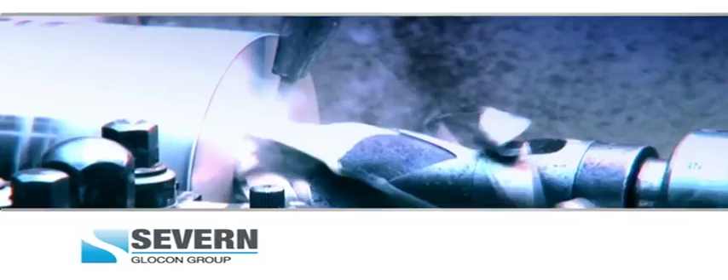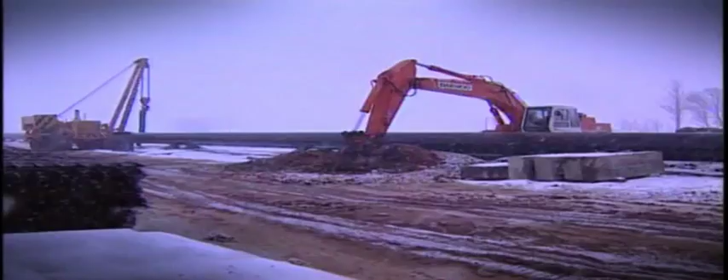Oil, gas, power. Industries vital to keep the world running and home to some of the harshest conditions known to man. Here, extreme pressures and temperatures mix with corrosive gases and liquids inside massive pipelines. Controlling them is a mammoth task. The room for error? Zero.

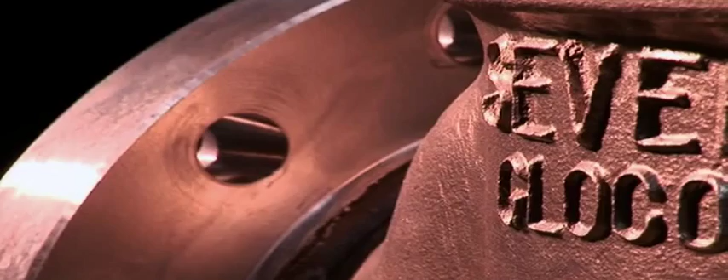This is the world of Severn Glocon Group, providers of specialist valves to the process industry front line for over 50 years.

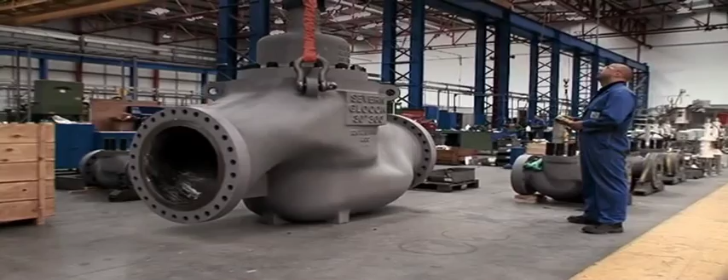Severn Glocon designs and manufactures a range of extreme control valves for hostile environments. The industries which we supply are oil and gas, energy supply industries and power plants all over the world. As a group, we can take on projects which are large in scale, maybe 100, 200 valves, or alternatively we can talk to the customer about specific issues that he's having and we will manufacture a single bespoke valve to suit that issue.

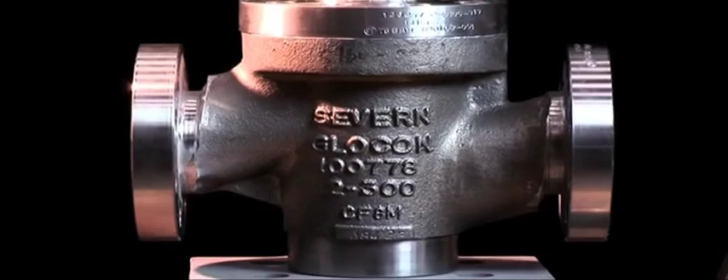Severn Glocon Group is a multinational company. Our international network of manufacturing, sales and service outfits offers our customers a truly global reach. Wherever oil, gas and power regions flourish, we operate. From the Far East to Australia, the Middle East and the Americas. We are also proud to have vendor approval from some of the world's leading suppliers and brand giants in the field today.

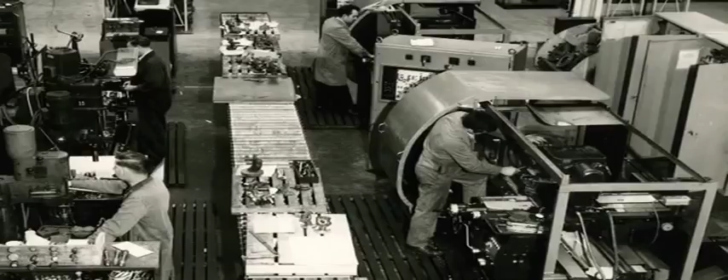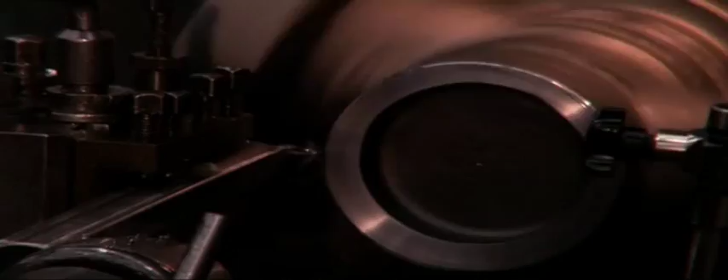At Severn Glocon, there is one thing we hold dear. Our British engineering heritage is at the heart of everything we do. Starting life over 5 decades ago as one of the UK's first specialist valve makers, we now boast state-of-the-art factories across England and in Chennai, India. British quality is built into every valve we make, from the final product right down to our initial engineering approach.

Severn Glocon doesn't really sell valves. We sell solutions to customers' problems. Our highly skilled workforce can manufacture valves from 2 inches to massive 36-inch bore diameter for the most extreme conditions.

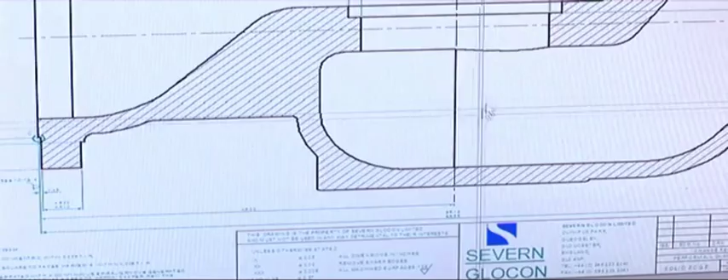We design exactly to the customer's requirements. We can determine the correct material for that application, the correct rating for the valve, the correct size. We can check noise levels, we can check velocities, we can check for erosion and corrosion, and from that we'll come up with a valve designed to suit its purpose.

The designs are crucial to us. Our in-house design team, we have 2D and 3D CAD, and that is common through all the Severn Glocon Group companies.

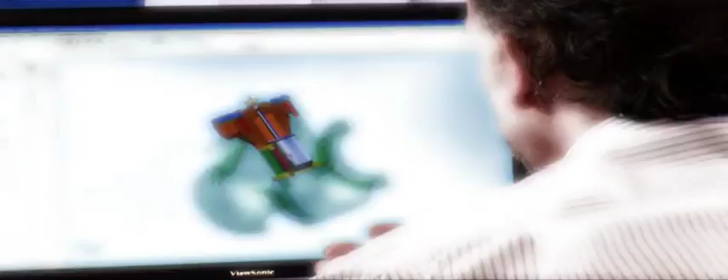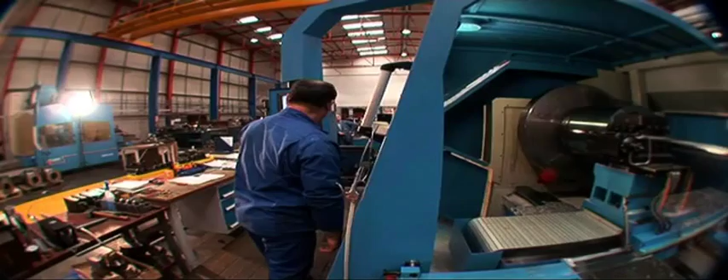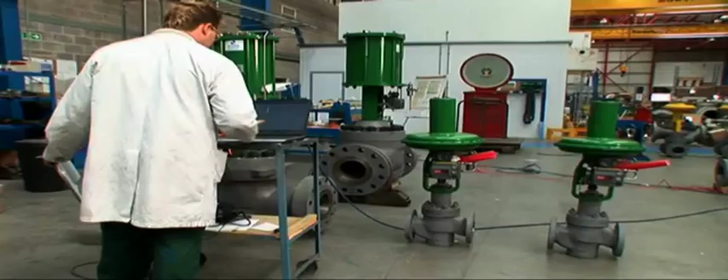Once designed, any valve made by Severn Glocon goes through a tightly controlled manufacturing process. High-tech CNC machines work to tolerances not normally seen on such large products. Our coatings range can meet any conditions, from simple epoxy resins to complex anti-corrosive systems. We have a positive pressure clean room manufacturing air separation valves for the food and healthcare industries. We assemble all valves in-house, where any type of actuator or intelligent control system can be added.

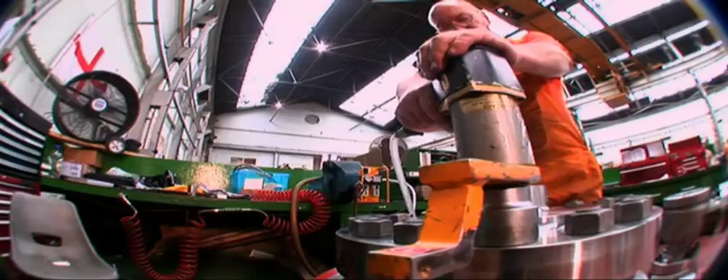In severe service, it's vital to the success of a plant that valves work as planned. We carry out all our own testing and make sure every valve meets the stringent standards demanded by liquid natural gas and oil and gas applications.

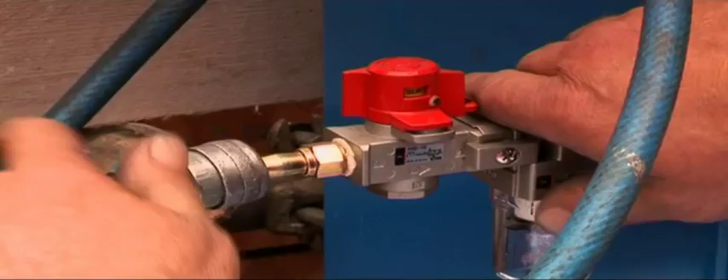Many air separation processes happen at extremely low temperatures, and any valves made for them must be able to stand up to the task.

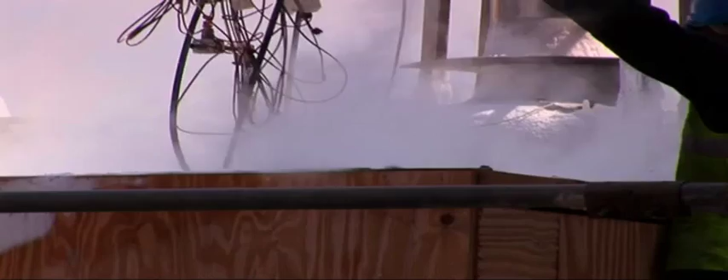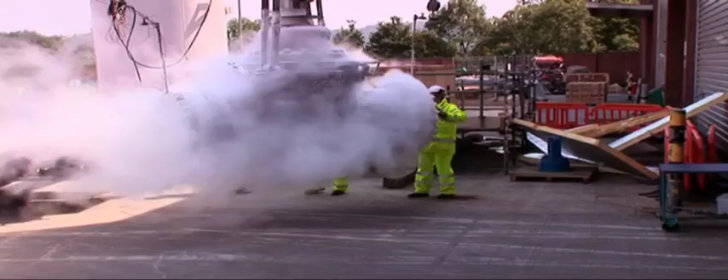A major part of Severn Glocon's heritage is working with cryogenic gases for the air separation industry. Valves behave differently under cryogenic conditions, so it's crucial to Severn Glocon that the valve will perform when it gets into service. Valves, some larger than 10 tons, are reduced to minus 196 degrees centigrade before being rigorously assessed and monitored through their full functions, all on our own premises.

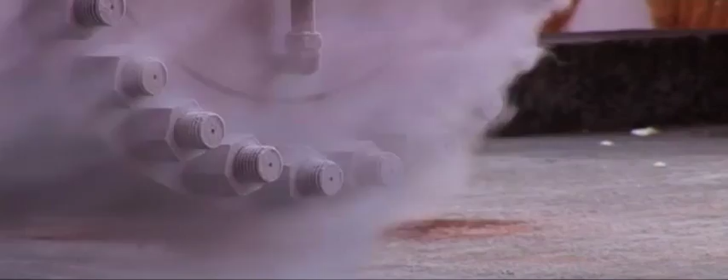It's something we've developed over many years. The procedures are robust, and by having that facility in-house gives us much greater control over the timeline for the testing and allows us to liaise very closely with the customer should he wish to come and witness that testing.

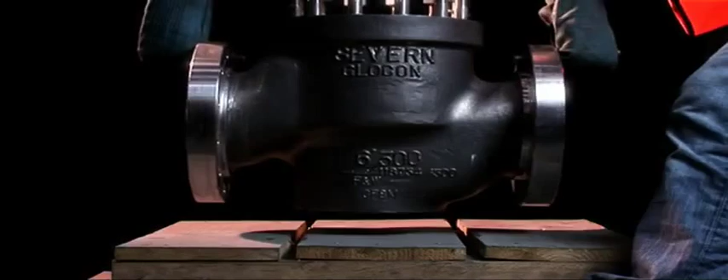Severn Glocon not only manufactures valves, but is a highly experienced service company too. Our approach is to continually look for ways to improve the efficiency and longevity of valves and valve systems.

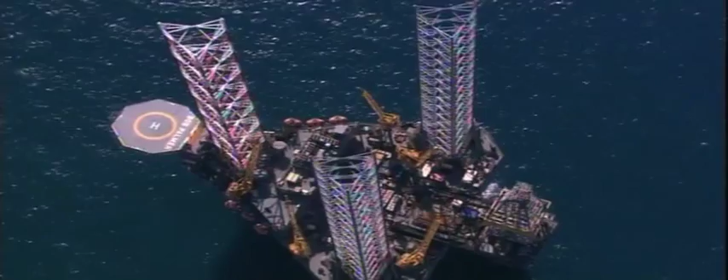The great thing about Severn Glocon is that it is not just a manufacturer, it is a service business. We provide valve management services to most of the oil and gas industry in the North Sea. And what does that mean? It means that we're looking at his entire population of valves.

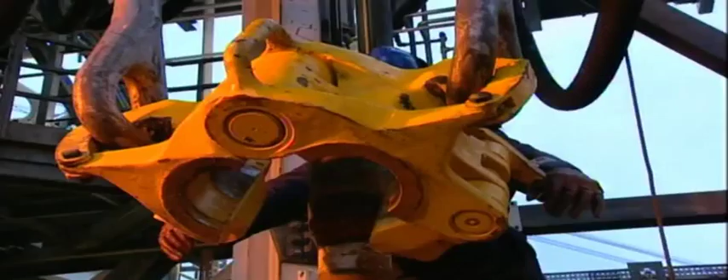We're looking at his safety valves and are they compliant with safety regulations. We're looking at their isolation valves and their maintenance regimes. All of which leads to us finding the issues associated with the valve population.

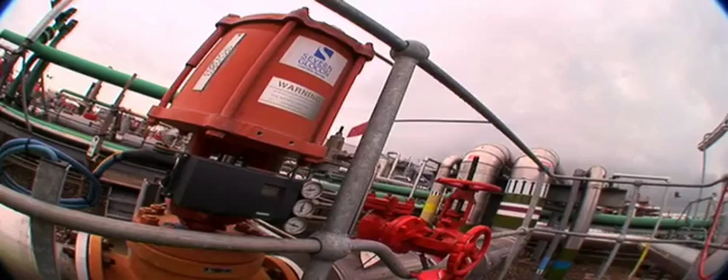A typical oil or gas platform will have 4,000 to 5,000 valves on it, and most will need servicing and recertifying every year. It's a mammoth task.

But when valves fail, time is even more critical. Our business is all about providing immediate service. We have people that are available on call whenever they're needed.

This year alone we've had guys as far afield as Sakhalin Island, which is away over the far-flung areas of Russia, into the Middle East, down into South Africa. We've had guys in Canada.

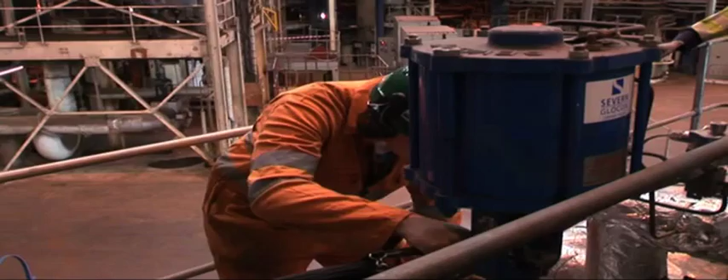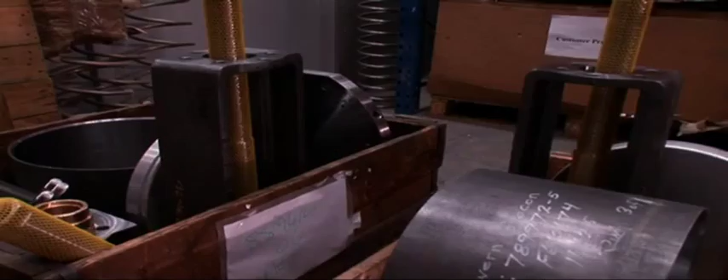Travelling far and wide, our engineers are demanded time and again on plants with changing characteristics or on ageing platforms. It's where their specialist skills make all the difference. To support our service operations, we carry an extensive range of spares, and our North of England factory can make one-off valves for individual replacements or repairs.

With an international network of sales and service centres, we can maintain, repair and recertify valves in installations all over the world. Our staff know the oil-producing regions and provide a local point of contact for wherever your business is. We have an office in Houston, Perth, Kuala Lumpur, Singapore, Korea. The guys manning the offices in the world are all very experienced technical engineers, been in the industry many years. The customer wants to know that they're talking to a guy who understands the equipment and understands the industry, and we are unique in that.

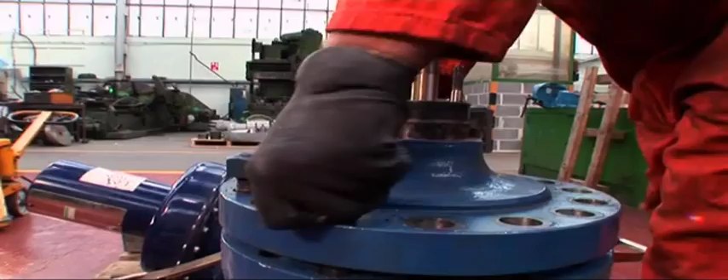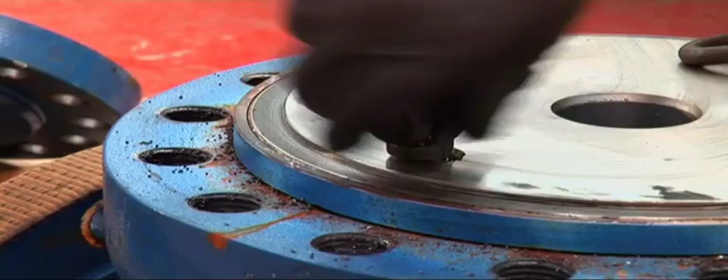This close contact with our customers and the thorough approach of our service division enables us to go one stage further, often discovering ways of improving a plant's efficiency. We have a group which we've termed Performance Plus, and really that's what we do. We look to improve the performance of valves in the field.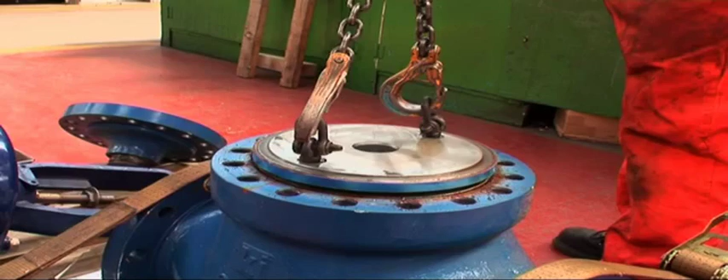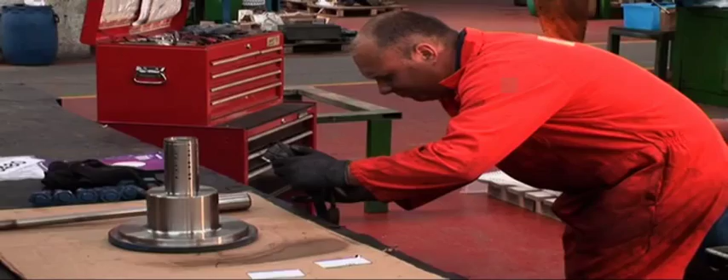It's only really there when you repair a valve, you open up a valve, you find that there's cavitation or erosion or mechanical damage. You can use that information to determine how the valve failed or why it's not performing correctly, or simply how the valve performance can be improved. If you do that, then you optimise the performance of the plant, which is what every operator is trying to do.

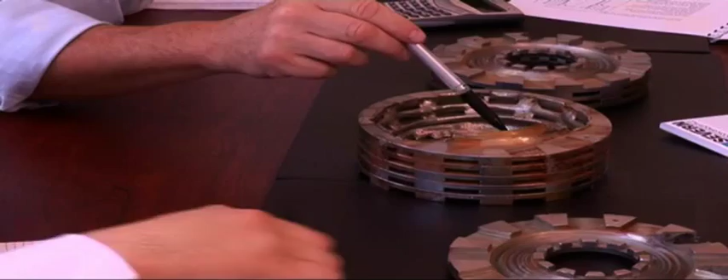Repair intelligence systems are key to the servicing side, where for over 20 years the cause of any valve failure we've dealt with has been recorded and remembered. We can often look back at our historical knowledge and we're able to say, we've seen this problem before. If we see this problem in certain parts of the North Sea, it's likely that someone in Saudi Arabia or the Middle East or wherever is going to have a similar sort of problem.

What we're really looking for is to talk to our customers about the control valves that they are having performance problems with, and using our repair intelligence that we've gathered over 25 years to improve the performance overall, not just because we think it will work, because we know it will work.

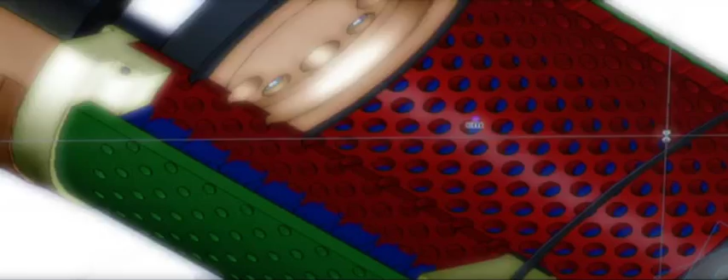The Performance Plus idea is not just confined to long-term service contracts. All knowledge gained from repairs is fed back into the design of new valves and can lead to big orders.

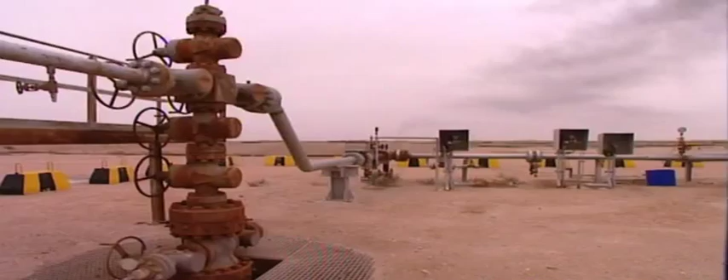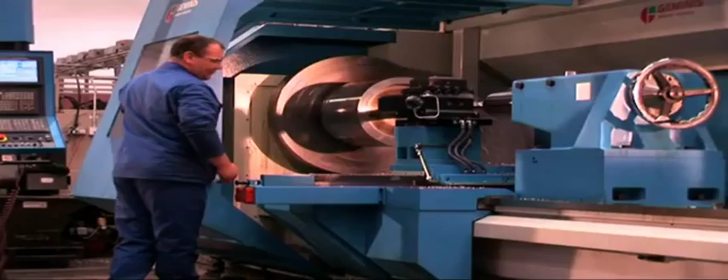For one of our customers in the Middle East, a long-standing problem with corrosive material was continually destroying valves. Our Performance Plus guys talked about it at length, came up with a new solution, one that hadn't been tried before. We designed it, we manufactured it, we installed it, and since that time the valves have been working over 3 years now without any failure.

With that in mind, and with a much bigger scale for the customer, at the tail end of 2008 we were awarded a major contract for the supply of 44 of a similar valve. This is just one Severn Glocon application making a difference for our customers.

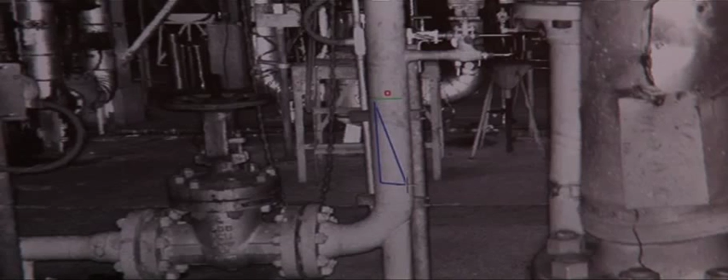But there are others. Our laser scanning division can help get a clear picture of your existing plants. Patented technology creates a 3D, fully interactive picture of any plant. You can see and accurately measure pipes not even visible to the naked eye.

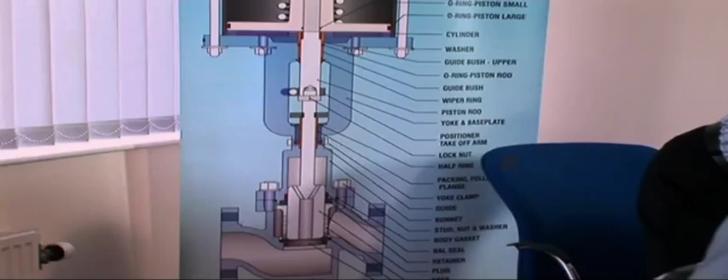And for those projects at the very earliest stages, we have a specialist design arm ready to offer a full consulting service. Whether retrofitting an old plant or at the initial design phase of a new platform, our highly experienced engineers can help you conceptualize and plan for your entire valve population.

As a company, we continue to build on our reputation as a world-class supplier of severe service valves. Severn Glocon has grown internationally and very successfully, partly because we have opened sales and service centres throughout the world close to the customer, but also because we are now manufacturing in developing world countries.

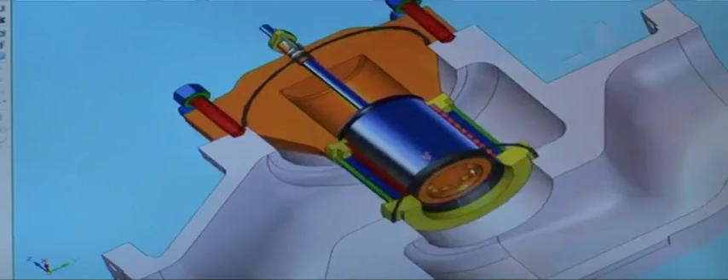We're pioneering the most advanced valve solutions. We don't sell a product, we actually solve problems. They want to call an expert company, and we are recognised and seen as an expert in solving control valve problems. We have a full cycle. We manufacture and support, or we support and manufacture to suit. And I think that gives us a very unique place in the market.

Severn Glocon is a global company. Our sales and service offices are near all major oil centres, and our British engineering history combines with international factories and personnel that mean we can offer truly special products at a world-beating price.